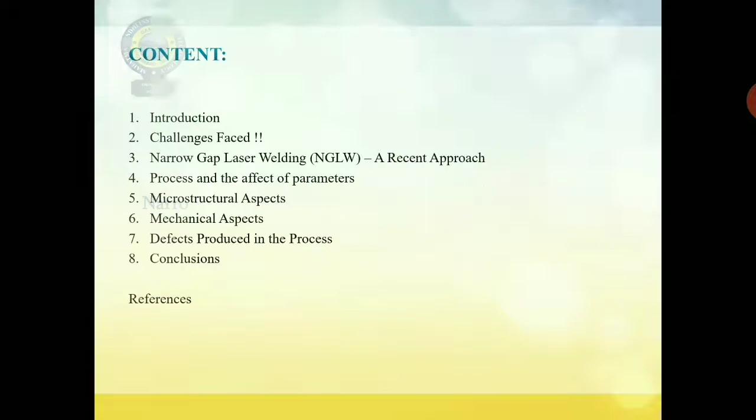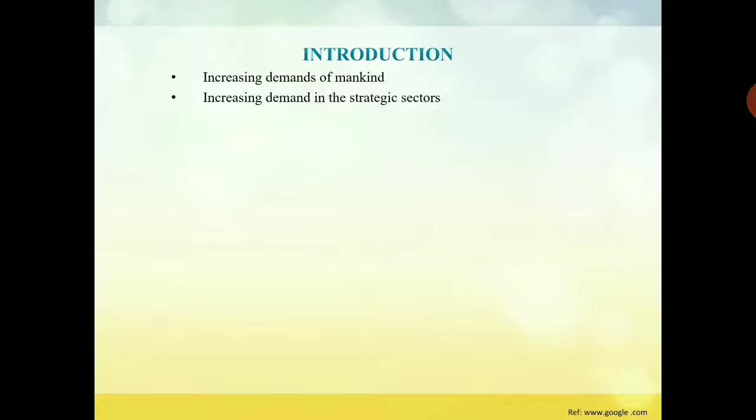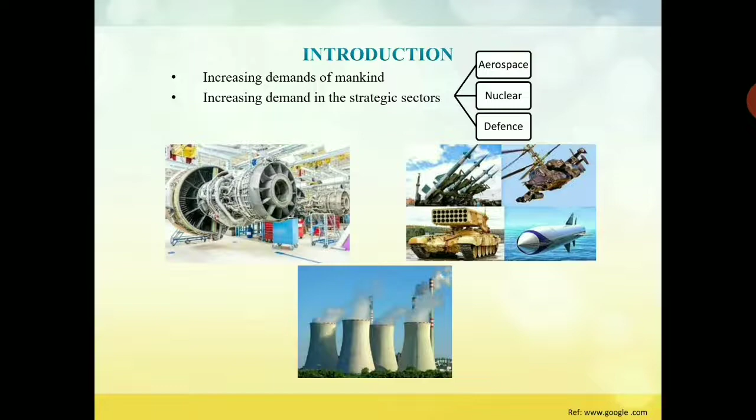Starting off, there are many reasons attributing to the advancements in joining processes. The first is the increasing demand in mankind, and secondly, the increasing demands in strategic sectors, that is the aerospace, nuclear, and defense sectors. These sectors need advancements to increase their service life and maintain longevity of the structures. Additionally, the conflicting demands of mankind to have comfort, safety, emission reduction, and sustainability have been the prime motivation to choose this topic for our research.

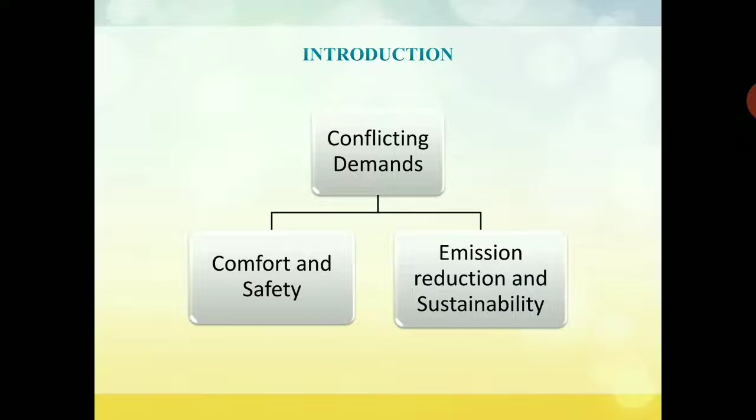Austenitic stainless steels have come to the rescue due to their metallurgical stability, high corrosion resistance, and good creep and ductility properties at elevated temperatures. Typical challenges faced during the welding of ASS steels are the induced tensile residual stresses caused by the high coefficient of thermal expansion of steels, lack of fusion between welding tracks and groove side walls, hot cracking, and porosity, resulting in degradation of mechanical properties and reduced corrosion resistance of the welded components.

To overcome these challenges, high welding speeds with high heat density and narrow gap width joint configuration must be implemented. Narrow gap laser welding promises to be a flexible process because here the laser beam is transmitted through an optical fiber to inaccessible areas for fabrication of thick section steels.

This multi-pass welding process contains an added filler whose function is to enhance the quality of the weld and also effectively tailor the microstructure and mechanical properties. A trailing shield gas like helium, argon, or nitrogen is also administered during the process to avoid atmospheric contamination.

Some key advantages of NGLW over other joining techniques are that it allows high welding speeds owing to its high power density, thereby resulting in increased productivity. Consequently, the distortion and residual stresses are lower due to low heat input. Moreover, this technique produces a heat affected zone that is narrow due to the narrow bead width.

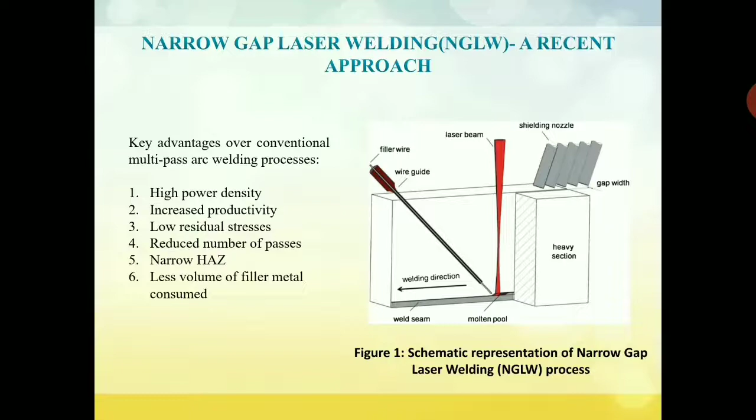Besides steels, NGLW has proved promising for welding aluminum alloys, nickel superalloys, and titanium steel bimetallic sheets. NGLW comprises of 4 basic steps. First is the designing of the groove, second is the machining, third is autogenous root weld, and lastly it is the welding of the remaining depth with laser and filler.

The following fishbone diagram depicts the input parameters that govern the weld. It is important to maintain near identical chemical composition of the filler to avoid difficulties during welding. Speaking of laser, a high power laser produces metal vapor, hence the power must be optimized. Also, using a defocused laser beam, which provides larger defocusing distance, leads to direct energy transfer, which in turn melts the sidewall.

The main characteristic of the shielding gas is to effectively isolate the weld zone from atmospheric contamination. Moreover, the consumption of shielding gas is reduced significantly when it is directed inside the groove. To obtain a smooth weld seam, it is also important that the droplet transfer is in the surface tension mode.

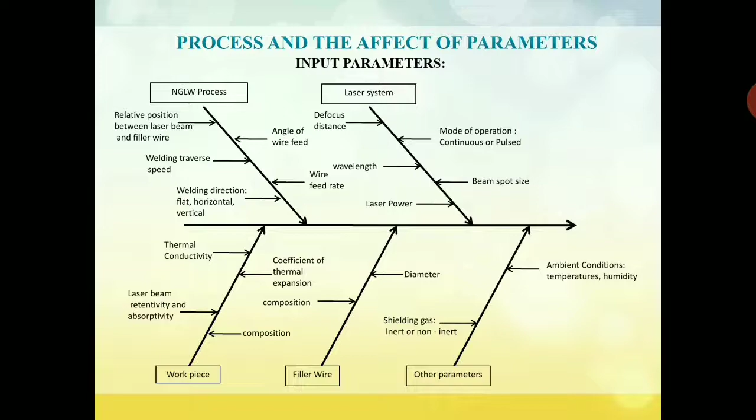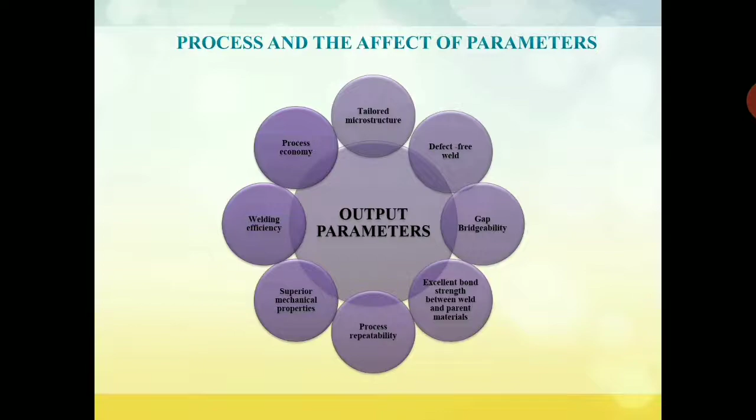If I talk about microstructural characteristics of NGLW joints, this processing technique is almost related to the laser cladding process. The product obtained from NGLW process is subjected to high cooling rates of almost around 400 degrees Celsius per second. Therefore, the microstructures in the root weld and the filling weldment greatly vary.

Use of high laser power or low shielding gas during root welding can result in concave meniscus at the bottom. It is because of the upward capillary action of the weld metal, as you can see in the figure.

Interestingly, shape of the surface of the weld after each pass can determine the lack of fusion. One report says that lack of fusion takes place in the convex and flat surfaces of the weld joints, while the concave surface of the weld joints represented the complete fusion.

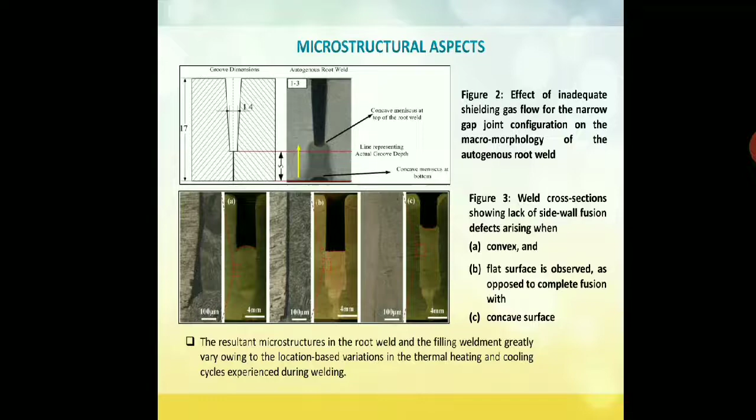The morphology of an NGLW joint is characterized by an H-shaped fusion zone. The fusion zone in the steels mostly consists of martensite phase in both tempered and untempered states, along with the presence of other phases such as ferrite, retained austenite, and carbides. It all depends on the filler material and parent material combination, and also on the thermal cycles experienced during welding.

The NGLW technique exhibits a special directionality in the columnar region of the weld bead with an equiaxed region in the center.

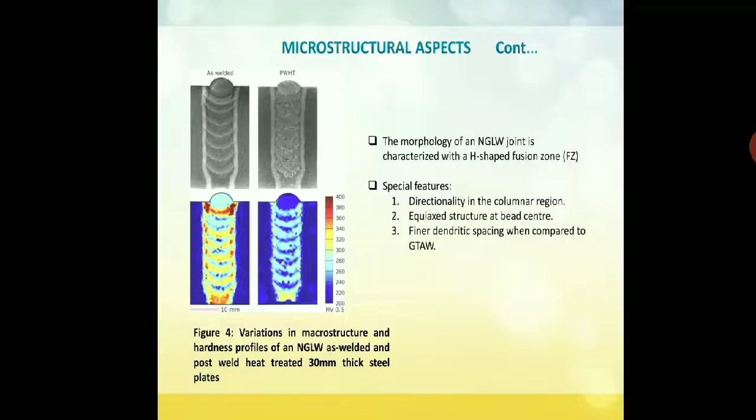They also found that the degree of hardness was highest in the capping pass, which you can see in the figure, and that hardness again decreases after post-weld heat treatment. You can observe an uneven hardness in the weld joints, right? Another study reported the presence of cellular grain morphology which resulted in this uneven hardness distribution.

Coming to the mechanical testing aspects, during the tensile test of S960 steels, it was found that the failure occurred in the base material, which was away from the welded region, with optimized parameters.

Reports also stated that when unoptimized parameters were employed, the UTS in 316L steel dropped drastically to about 512 MPa. In other steel D406A, NGLW process proved superior to GTAW as homogeneous tempered martensite was obtained in the microstructure.

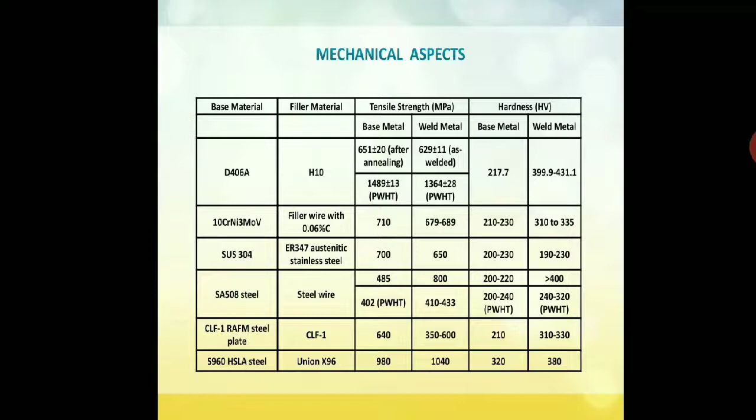The other part of the presentation is NGLW process defects. One of the major issues with this is lack of fusion, which occurs between side walls of the groove and the weldment. The other one is weld root cracks, which arise due to incorrect selection of process parameters.

To obtain a defect-free weld, the width of the lower section of the weld bead should be greater than the groove width, or else incomplete interlayer fusion takes place.

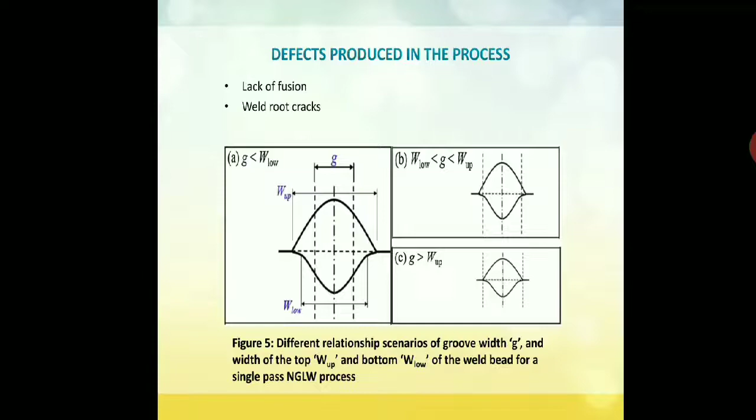In some cases, when the liquid metal solidifies much faster than the required rate, entrapped gases and slag impurities do not get time to escape. This causes unwanted porosities and inclusions.

The remedies for these defects are to use low-medium laser power and low wire feed rates, and alternately it is suggested to increase the defocused distance of the laser beam. By using an oscillating laser beam, you can avoid solidification cracks, and porosity and inclusions can be avoided by the inter-layer cleaning process.

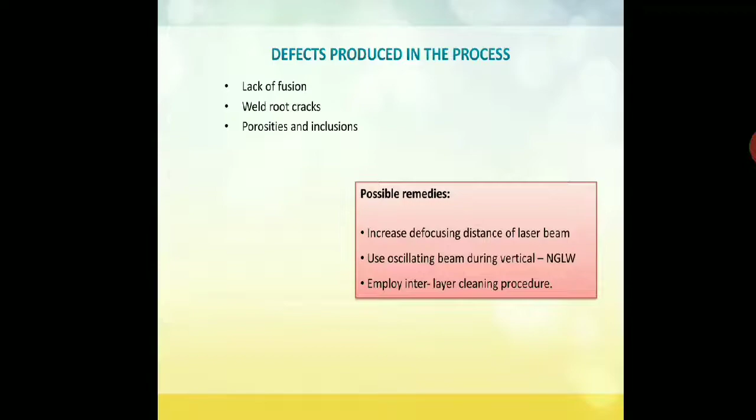Moving on to the conclusion, industrial demands for improving quality and productivity resulted in the development of advanced welding technologies. Although there are many welding technologies, they are restricted up to 50 mm thick structures. For this, NGLW has been found to be a good solution for such applications, and productivity has also increased greatly.

Research towards welding in 2G and 3G positions has to be carried out, and the effect of corrosion resistance on the welded components must be studied. This brings us to the end of the presentation, and these are the references which we have taken.